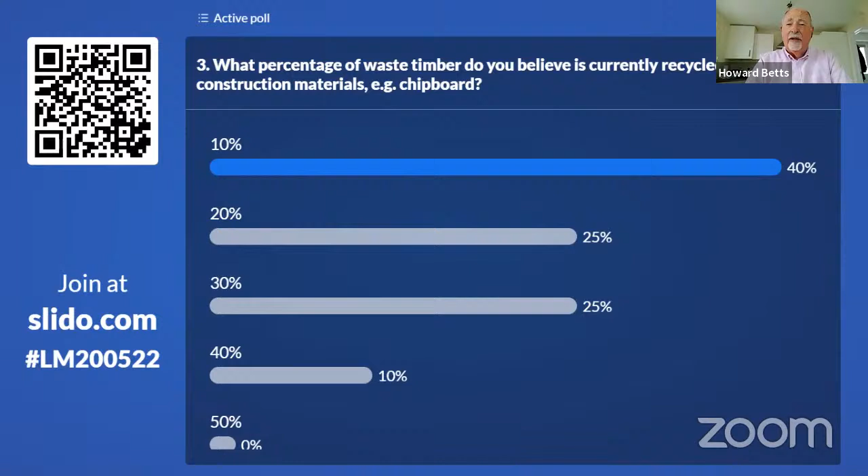Yeah. So, next question: what percentage of waste timber do you believe is currently recycled into other construction materials, e.g., chipboard? 10%, 40%. What do you think? Have people got that right, or are we going to wait for the answer? The answer is actually nearer 20, and we'll look at where the rest of it goes as part of the presentation. So, a big mix there. A lot of variation in what people think is actually happening at the moment, which is understandable. So, there's no right or wrong answer to any of these.

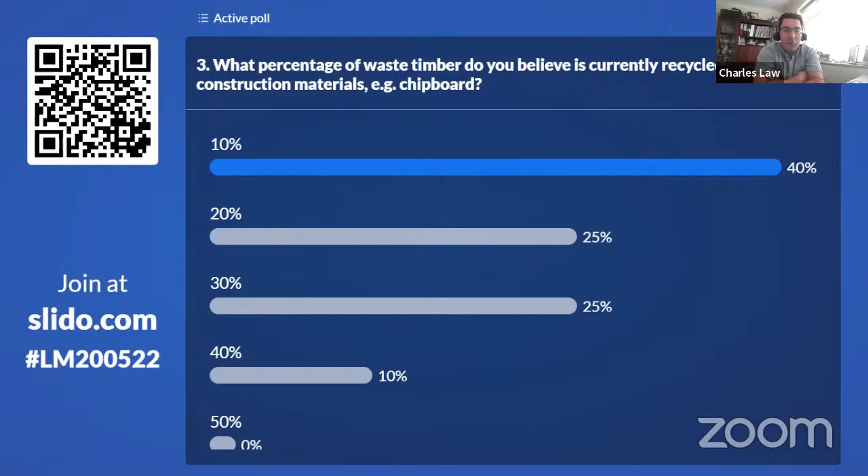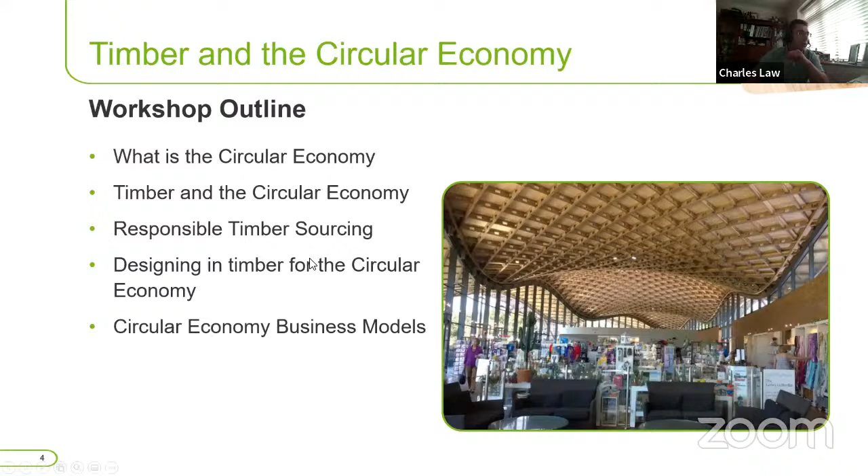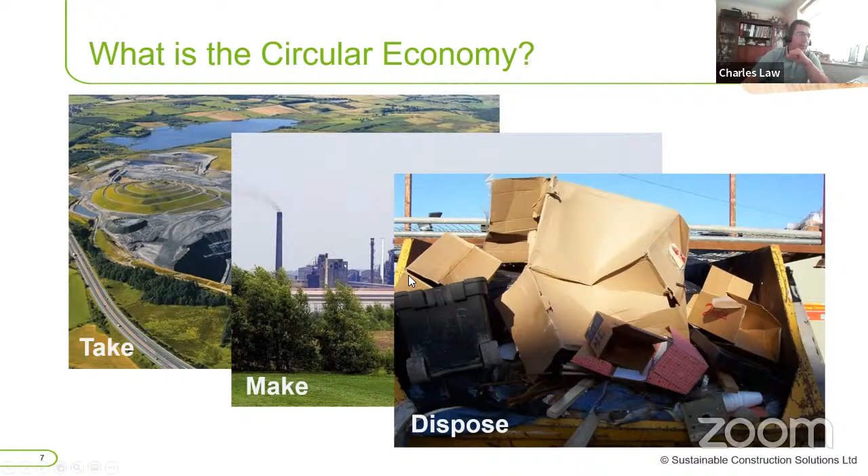And what is the circular economy? Back when I started in the industry, the circular economy was never thought about. We just had what we call a consumer model, where we take stuff out of the ground, we make stuff with it, and then dispose of it in skips. And that has resulted in a hell of a lot of waste. This is a diagrammatical explanation of that. This is the process of materials at the moment: take, make, dispose.

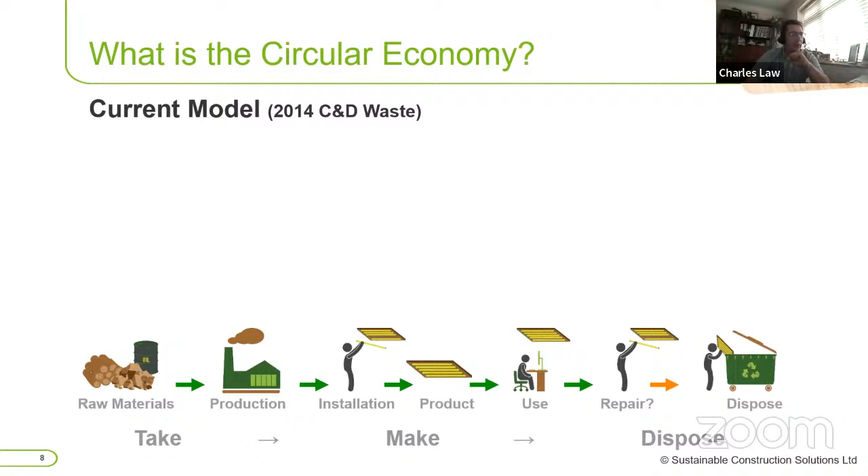Most of that goes off-site as waste in the various different parts of the supply chain. That currently ends up going through what we call a materials recovery facility, or a MRF. A fair proportion of that goes in the construction industry. Maybe a certain amount gets reused, but that's generally the heavy stuff. And when I say reused, that's probably downcycled into things like aggregates.

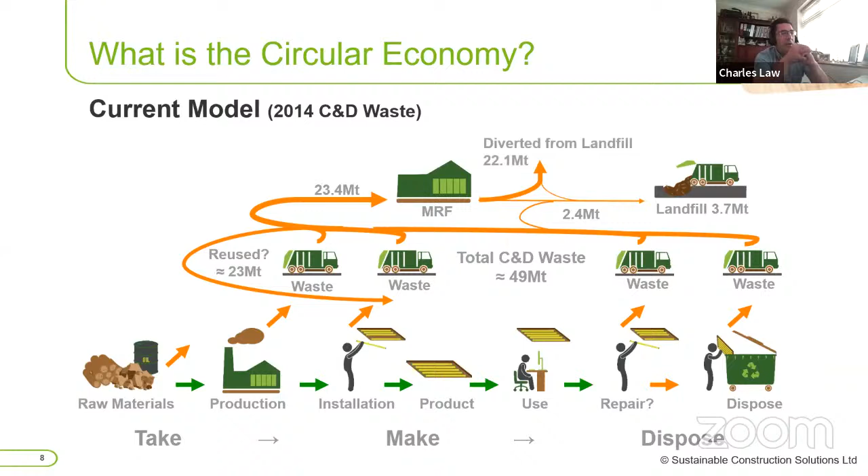And around 3.7 million tons ends up in landfill, and these are the last figures we got from DEFRA, because the last time they actually funded a study into C&D waste was 2014. So unfortunately these figures are quite old, but they may have improved slightly since then. But as I say, DEFRA haven't funded any further research in this. Now, we see a fair bit being diverted from landfill, but the trouble is up to half of that is actually going into energy recovery and waste.

A lot of the remainder is going to what we call open loop recycling, so there's no defined end use for that decided at the beginning. It's just, well, we've got some plastic or we've got some steel, we'll recycle that into something else, rather than being a closed loop model. Very little waste is going in through a closed loop model, and that's really where we need to get to, to really reach the circular economy.

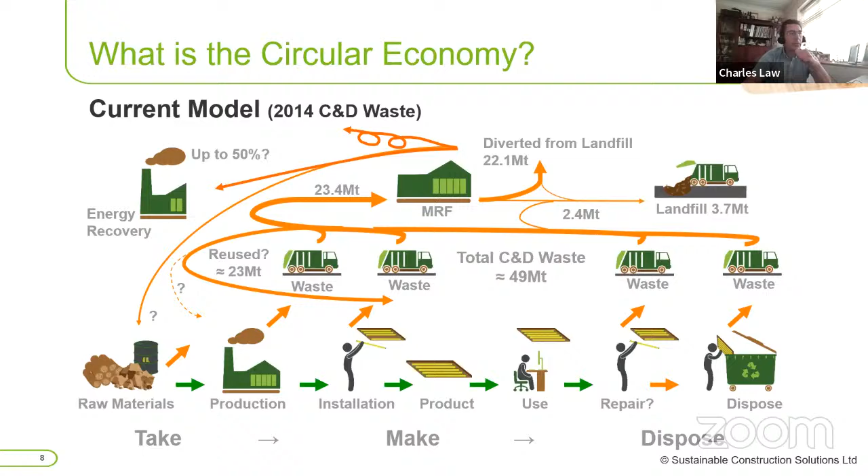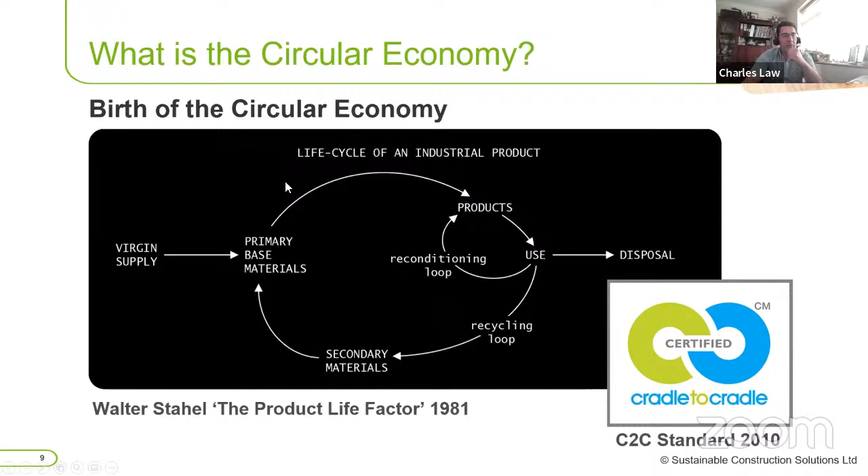That was improved upon by people like McDonough and Braungart, who developed their cradle-to-cradle standard in 2010. Also around the same time, you had the Ellen MacArthur Foundation come up with their butterfly diagram. Both of these sort of introduced this idea of these biological and technical nutrients, which on the face of it seemed like a good idea.

You've got your technical nutrients, which they talk about steel and stuff like that, which you maintain and reuse, redistribute, refurbish or remanufacture, and trying to keep it into the inner loops here is the best option.

Then you've got our biological materials, which, to be fair, timber would fit into, where we cascade recycle it and then it goes into the biosphere and goes back into the earth. But my view on this is actually timber sort of straddles both of these items, because especially when you start talking about engineered products like CLT and glulam, we very much need to make sure we keep them on the technical nutrient side before they end up in this cascading model.

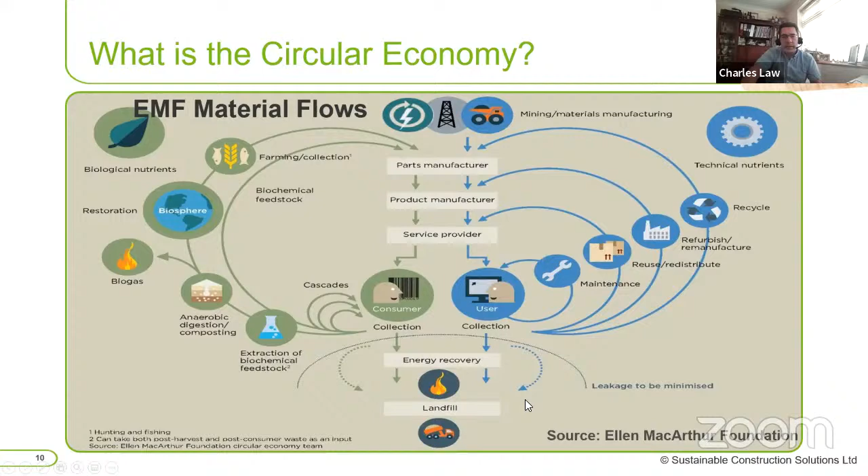Obviously, the key thing in this model that it talks about at the bottom here is that we need to minimize the material being lost from that cycle. So anything being burnt or landfilled, we need to keep to an absolute minimum.

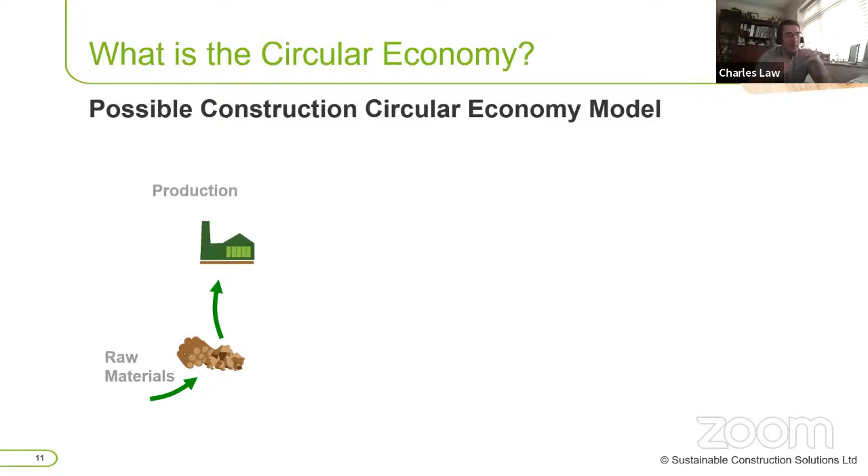So I've tried to then redefine this as how we could do this within the construction industry. We've got our raw materials coming in, and we've got timber and aggregates, and we've got our oil-based products such as plastic, which we're going to need to try and design out going forward, because it's just not going to be there. Our production facilities, we need to start moving over to more renewable energy systems to power those.

We need to look at the business model of how we're going to actually sell our products into the market. Where we sell things now, we're starting to see things around leases and service models starting to come into the industry, which might be the better option for our business. We see that with cars at the moment. 20 years ago, we've all bought our own cars. Nowadays, a lot of people are actually leasing cars rather than buying them. So that's an option we've got to look at.

We then install that product, and as part of that process of the manufacturing and installation, we're going to get some waste, which we need to try and make sure we recycle back into the system.

We then get our installed product going into our building, and we're going to use it. We need to make sure we maintain it to keep it in service for as long as possible, and try to keep that product in use. But obviously, it will come to the end of its service life at some point, and we need to try and make sure we deconstruct it.

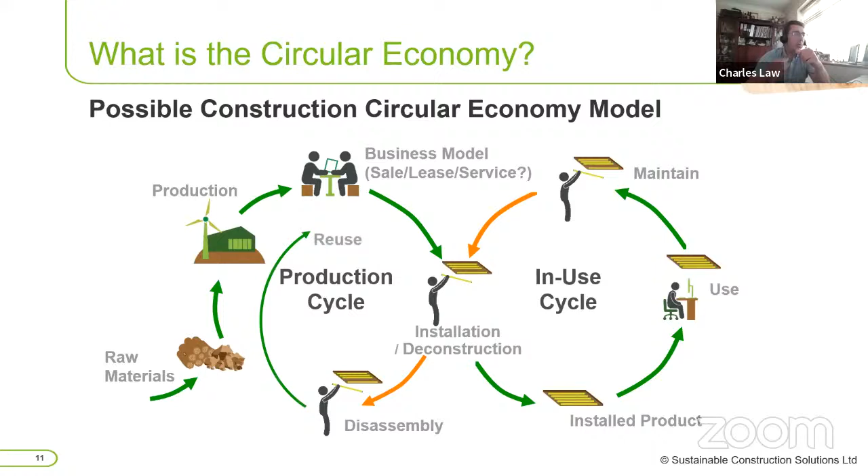It's deconstructible. We can then disassemble the product itself into these different component parts, and each of those component parts might then be able to be reused. Where they can't be reused, they might go back to the factory and be refurbished or remanufactured. And as a last resort, we should be really looking at recycling.

We talk about recycling being really good at the moment, but actually in the circular economy, that is the last resort. We need to think of all these other options first. If we do that, we can reduce that requirement on raw material, which is a finite resource. We talk about timber being renewable, but there is only so much out there we can use at any one time, so to a point it is finite. That will reduce our need on it, and anything lost out of that cycle, we need to make sure we've got some defined usage for it.

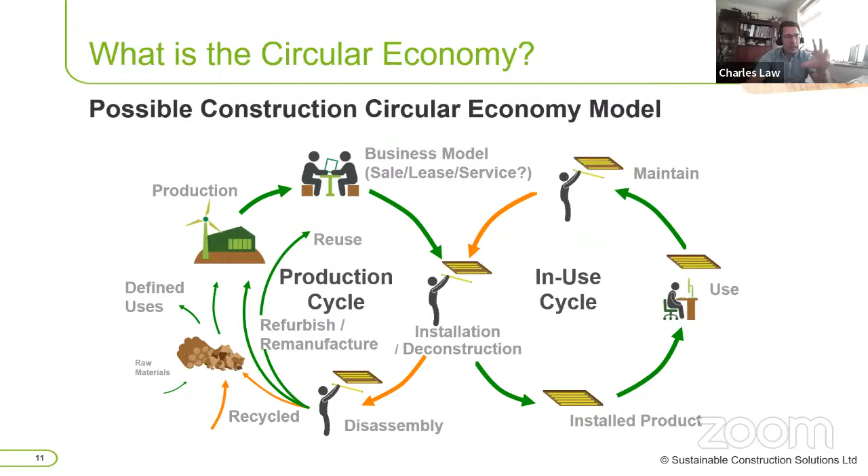So that's sort of the model we're going to be focused on today, and how do we move forward with that.

Focusing on timber specifically, this is a diagram produced by CEI Bois, the European Timber Industry Federation, showing how timber moved around the system. I've actually added to this, because there wasn't enough on it for me to say what's actually happening with all this material at the moment.

So we've got a very small amount going to landfill. Timber, actually, less than 1% of timber waste goes to landfill at the moment, which is great. Just to put some numbers on that, the vast majority, though, is very much going into energy recovery.

The biomass market, to me, is not the right thing we should be doing with certain bits of timber at the moment. We talked about 20% being recycled into panel boards or insulation, and another 10% going into animal bedding. But if you look at those, all apart from the panel boards are short-term products. So that carbon pulled out of the atmosphere by those trees very much disappears after a short amount of time, and it's only the panel boards keeping that carbon locked up. So we could be doing a lot more with that.

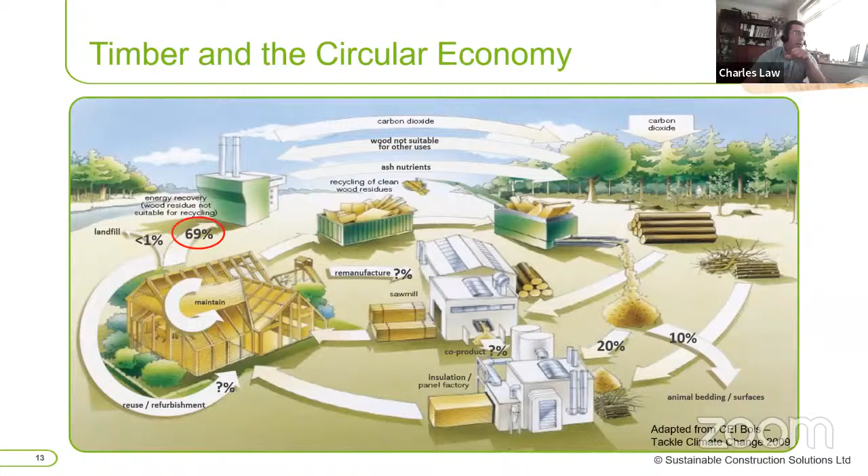We start looking at the maintenance, reuse and remanufacture elements, and we really don't know what's happening with that market at the moment — there is no data on that. But like I say, for me, we need to look at that recovery model.

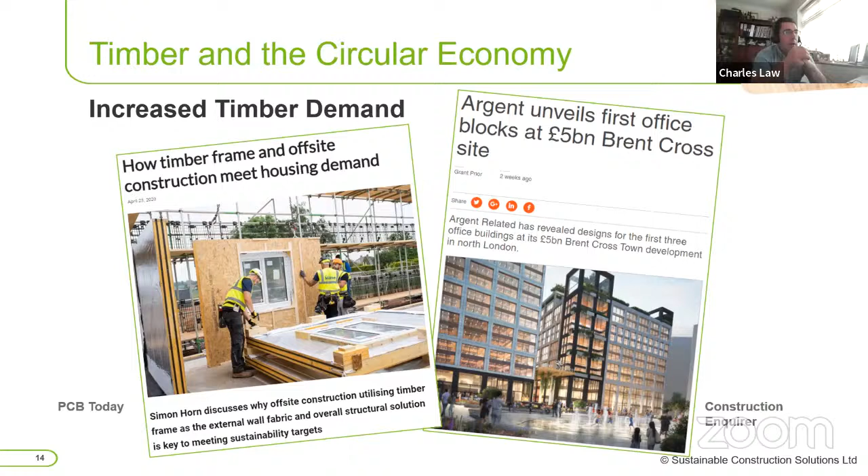We're getting ever increasing demand for timber. A lot of you have said you're going to probably be using more timber in your projects going forward. So where is that going to come from? We need to think of different ways of using timber and using different types of products that have the same end result, but by using different types of materials and being more resource efficient with that material going forward.

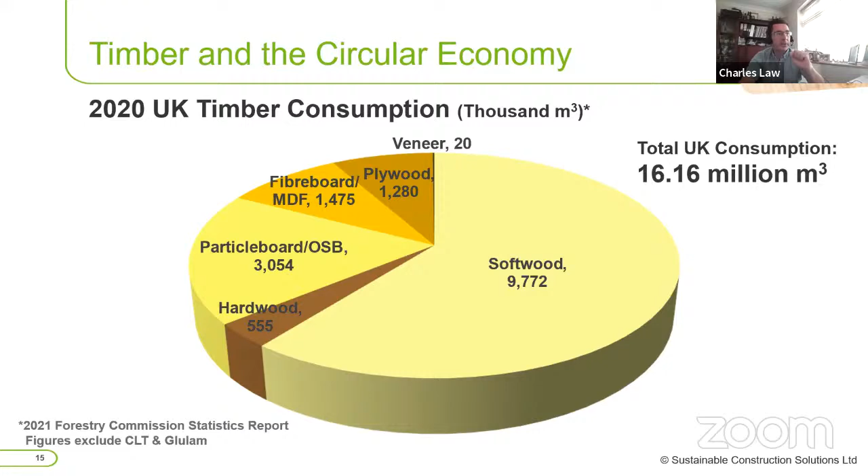On average, most years it's probably nearer to 17 million. This was obviously 2020, the pandemic year, so there was a slight drop there, but usually you're looking at around 17 million cubic meters of timber.

Now, when you start looking at where that comes from, most of it is actually coming from reasonably secure sources — the UK a decent percentage, and the vast majority coming from the EU. But then you start to see certain amounts coming from places like Russia, which is now gone. We've stopped all imports of timber from Russia, and there was 500,000 cubic meters of timber coming in just from Russia, and now that's got to be found from somewhere else. So there are issues around security of supply.

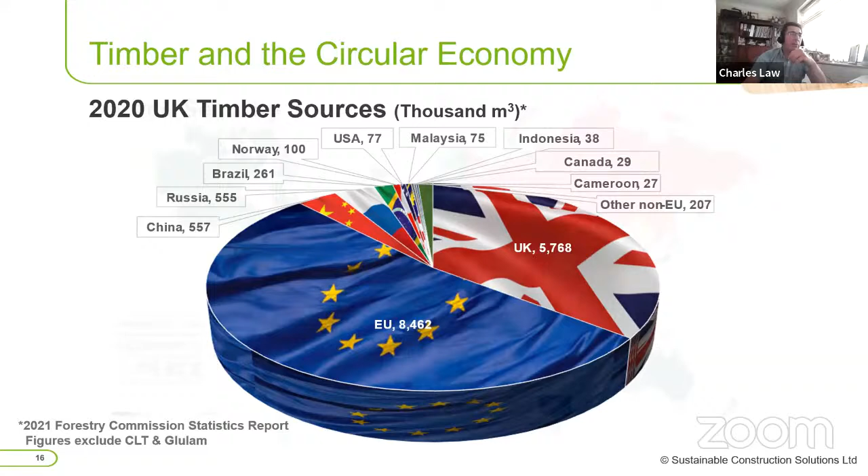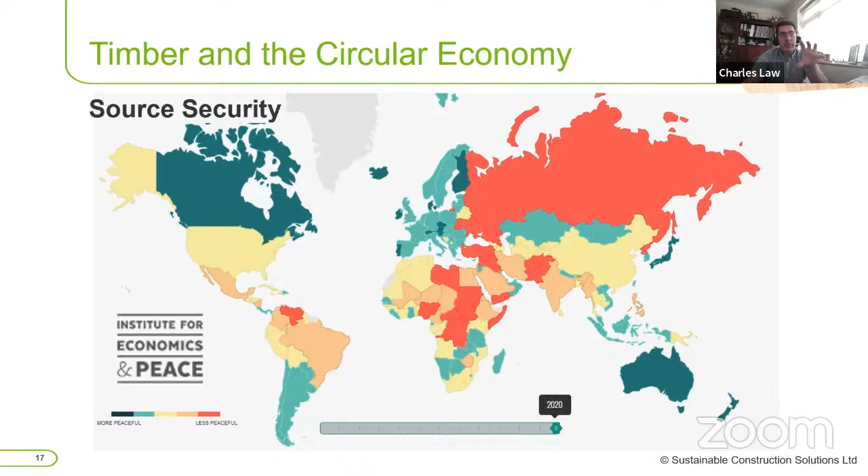When we look at the Institute for Economics and Peace's peace maps, we see Russia and Ukraine being very much an issue of source security, and that supply is now stopped — it's gone. Europe, luckily, is fairly stable, so we shouldn't see too many issues with those timber supplies, but everyone's obviously after the same timber at the moment. We talked about the amount of timber being lost — yes, it's that 4.7 million hectares.

That has gone down since the 90s, when it was probably at its peak when we first started looking at this. But when we start looking at where that's from, obviously we start looking at things like South America, Sub-Saharan Africa, and the Far East. Those are the sort of areas where we're losing most of that resource.

Luckily, most of the stuff we're getting from Europe is generally going to be responsibly sourced, and we're not, at the moment, impacting on that deforestation. But there's a lot of countries in Europe which are very much on the grey area, where it's just finely balanced. And if we start using a lot more timber, could that start to tip into a net loss? That's what we've got to be careful of going forward.

As far as drivers for the circular economy, you've got things like BREEAM. I'm actually on a working group with BREEAM at the moment to see how we can include more circular economy measures within it. There are some at the moment around waste and things, but that's only going to increase. And SKA is probably the one that's got the most circular economy requirements in it. So this is coming, and we are going to have to do it.

So how do we do this? Well, firstly, if we're going to be using timber, we need to make sure it's responsibly sourced. I think that's the first thing. Timber is a circular economy material already, if you're getting it from a sustainable source. We are replanting trees, and we're always going to have that resource if we use it efficiently.

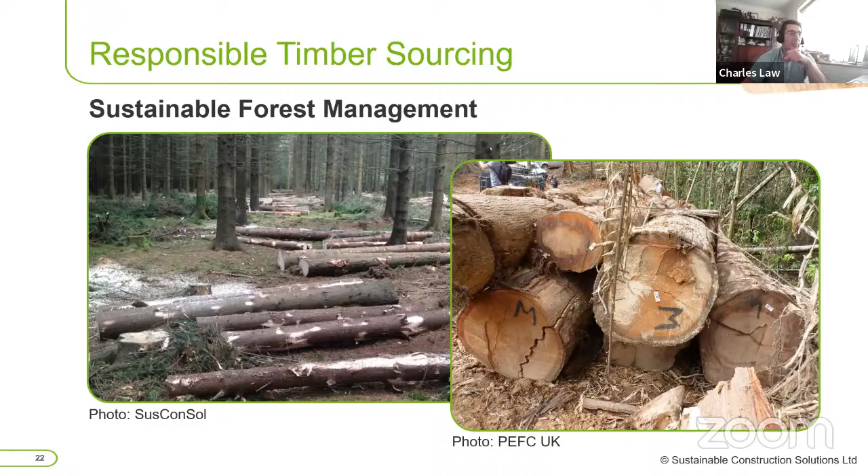Obviously, this is a requirement for many customers, not least the government, and a lot of companies have adopted similar policies where they'll only accept timber from legal and sustainable sources, needing appropriate documentation. That applies to all virgin timber and wood derived products used on the government estates, including temporary site work. So we need to make sure we think about things like hoardings and shuttering timber and any protection that you might use. A lot of timber is used in those elements on certain sites. So we need to make sure we include that in there.

Basically what the government has said is that you need to make sure you comply with one of these, with their central point of expertise on timber. So you have to gather evidence either from independent forest certification schemes, such as PEFC, the Programme for the Endorsement of Forest Certification, who are actually sponsoring today's event, FSC, the Forest Stewardship Council, or Grown in Britain, although that's in the category B evidence at the moment. That's likely to move into the Forest Certification Scheme when they update this. So, as a UK forestry source.

That's our best way and easiest way of ensuring that our timber has come from that responsible sourcing. And like I say, if you want to learn a bit more about responsible sourcing and how you can track that, if you weren't on our last course, look at the PEFC website and you can sign up to one of their responsible timber sourcing CPDs that we do on there.

Where does that responsible source timber come from? There's a lot of countries in the world now that are sourcing timber that's got forest certified to one of two standards, PEFC or FSC. You can see that most of the forests in Europe and North America are actually certified against one of the PEFC type schemes. FSC is generally concentrated on the high risk areas, such as South America, Africa, Far East, and Russia.

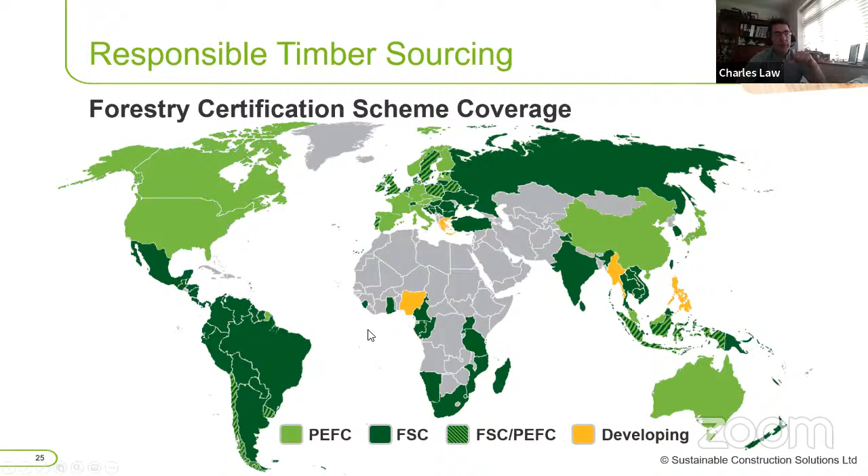What we're saying is one scheme isn't better than the other. Just make sure that you don't just choose one scheme, because there are some companies out there that say it must be FSC timber. But if you look at this, that could cause an issue with your supply, because you're very much limiting where you can get your FSC timber from if you just specify FSC. Especially in the situation at the moment where there is a shortage of timber, you might not get what you want.

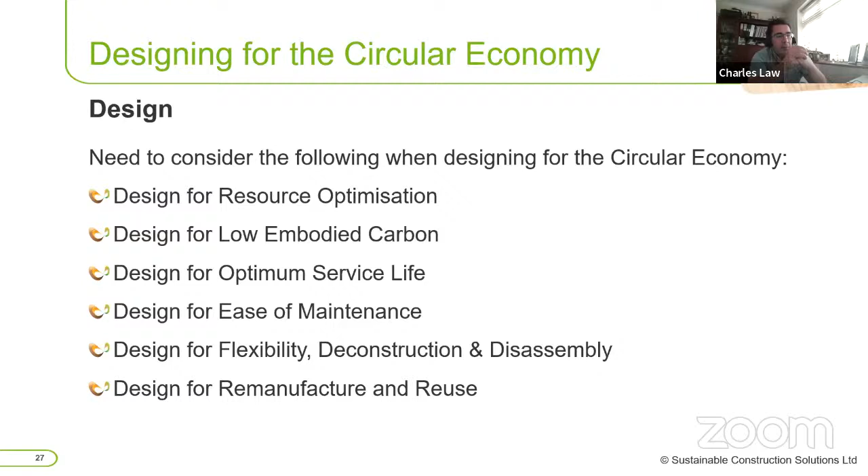So moving into designing for circular economy. For me, what I've generally broken this down to is 6 main areas. We need to design for resource optimization, design for low embodied carbon, design for optimum service life, ease of maintenance, flexibility, deconstruction, disassembly, and then remanufacture and reuse. We'll cover each one of these in turn as we go through and explain them.

Designing for resource optimization can mean a number of things. The first one is you make the best use of the existing resource available on the site. So if we've got an existing building or structure there, should we actually reuse that rather than knocking it down and building new? Let's do a pre-demolition audit of the site, look at what's there, and see if we can actually reuse most of that, if not all of that structure, in our new build.

The next bit is we need to make sure we use the best use of the resources from the forest as well. So rather than just using lengths of timber, which we may have done 60, 70 years ago, we would have chopped a tree down and maybe only got 50, 60% of the wood out of that timber, because we want to change a round item into a square or rectangular section. So there's a certain amount that's lost out of that. And when the tree's growing, we thin certain trees out that are in the way of the good ones that are growing. What happened to those?

What happens now is things like OSB, orientating strand board—you might know it as sterling board or smart ply—that's made of those thinned materials. So we're making a much better use of the resource. The stuff that we're cutting off, we might be using some of that for pallet wood or the falling boards on the side. The chip and sawdust material is going into things like chipboard, as a co-product from the primary processing. So we're making much better use of that round log, where in the past we might have only used certain parts of it.

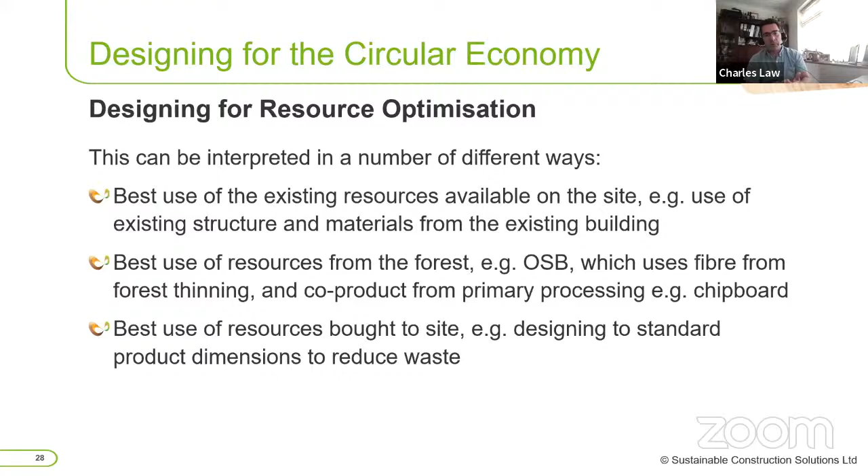So we've made the best use of the resource from the forest, but are we actually making the best use of the resource brought to site? In that situation, it's about minimizing offcuts, minimizing waste on site, designing to standard product dimensions to reduce waste, and off-site construction so we can utilize a lot more of the material. Those are the sorts of ideas that we might need to think about there.

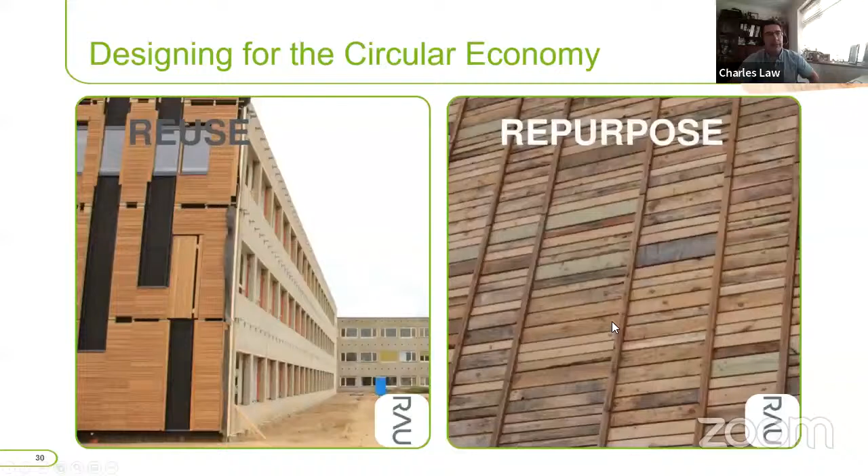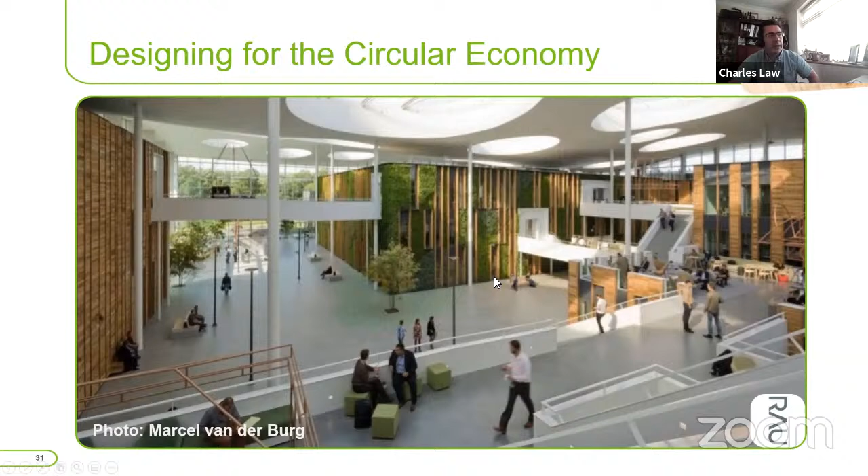This is actually pallet wood from waste pallets that they've used internally as a cladding material, and what they've ended up with is this building inside. So this is the pallet wood on the left-hand side here, and on the right internally, obviously because it's not treated. That's what the internal artist's impression was, and that's the actual picture of the completed building.

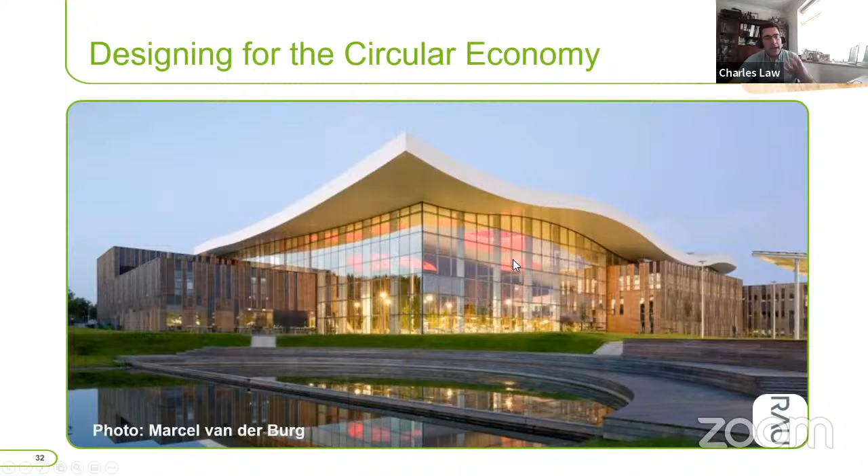So all of these bits that are poking out the sides, they are those original horrible looking concrete buildings that we saw in the original picture, turned into a lovely open plan office environment. So you can make much better use of existing buildings if we think laterally.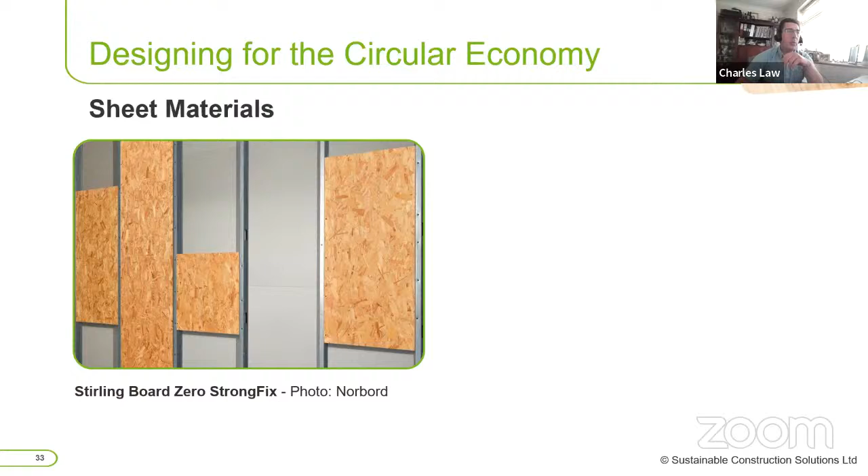Talking about how we can use better resource from the forest, we talked about OSB. There's lots of different types of products this can be used for now. You can use it as flooring or as a sheet roofing material, as many people may know. But also they've got lots of different sub-products associated with that. Things like Stirling Board have got their StrongFix, which can be used for pattresses within stud walling systems, for example. Or SmartPly have got their ProPassiv, which is an air-sealed board, which you just have to tape the joints on to create a passive house structure.

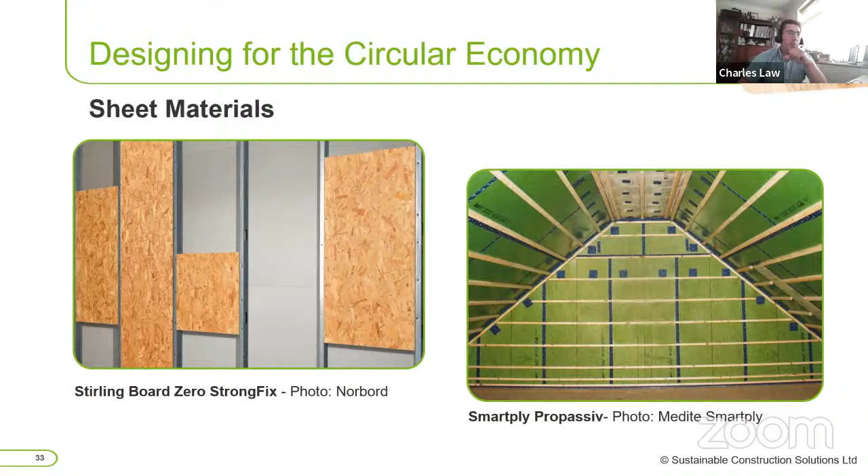So there are many more different products now being made out of things like Smart Ply, making much better use of that material from the forest.

You've also got engineered products like these I-joists from Metsä, where they've got an OSB web in the middle there, with a plywood or LVL top and bottom to them.

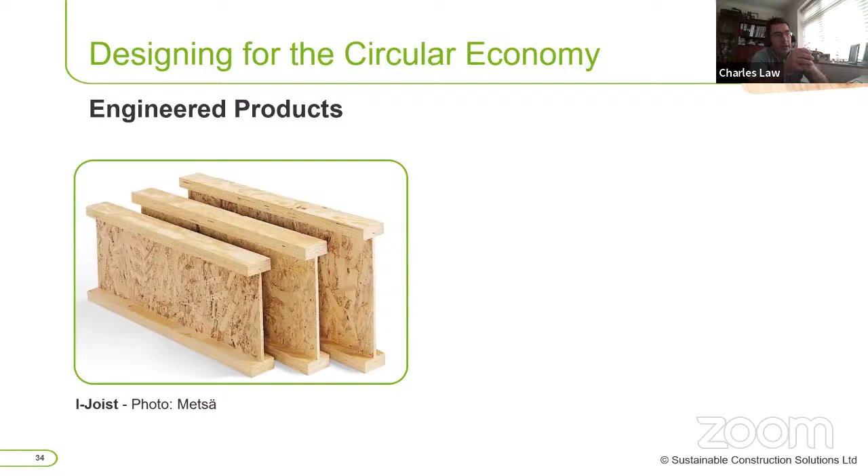So again, we use this rather than using solid bits of timber that we may have used in the past to make a large joist. We're now using much smaller bits of timber, much less timber in that product, made from a much more renewable resource, because we're using all the offcuts that would have been skipped 20, 30, 40 years ago. We're now making a much better product that's actually much stronger than the original piece of timber we might have used. LVL is another similar example, where you've got these long beams that look like plywood.

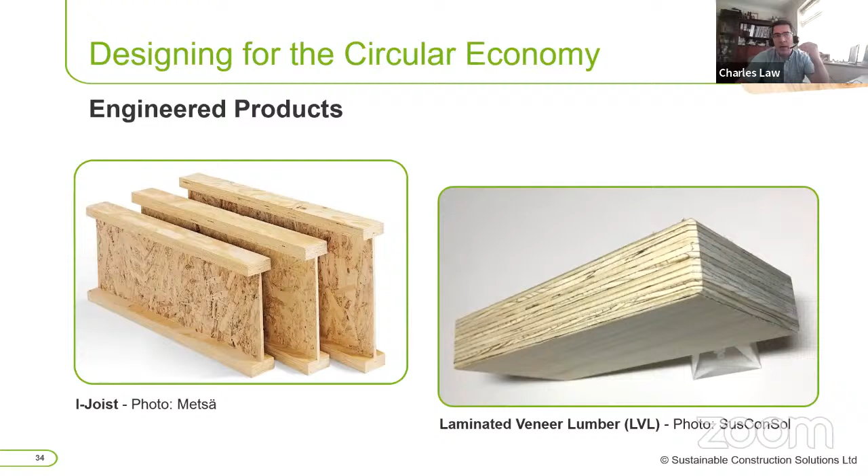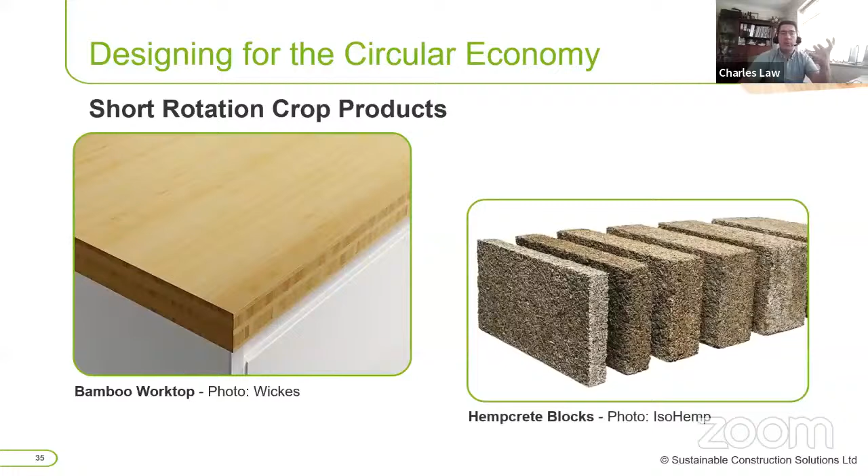And then we need to look at other products as well, where we might use timber at the moment - could we use other crop materials, so short rotation crop products like bamboo and hemp, so hemp blocks that might be able to use, which are all grown materials, not timber, but a grown natural fiber product that we could start using.

We need to be designing for lower embodied carbon, and like I say, timber, when it's growing, it's taking CO2 out of the atmosphere and turning that into carbon in the actual timber in the tree.

So on average, you might get sort of 1.6 tons of CO2 being stored in every ton of timber. It works out about 700 kilos per cubic meter of timber, if you want to put it that way.

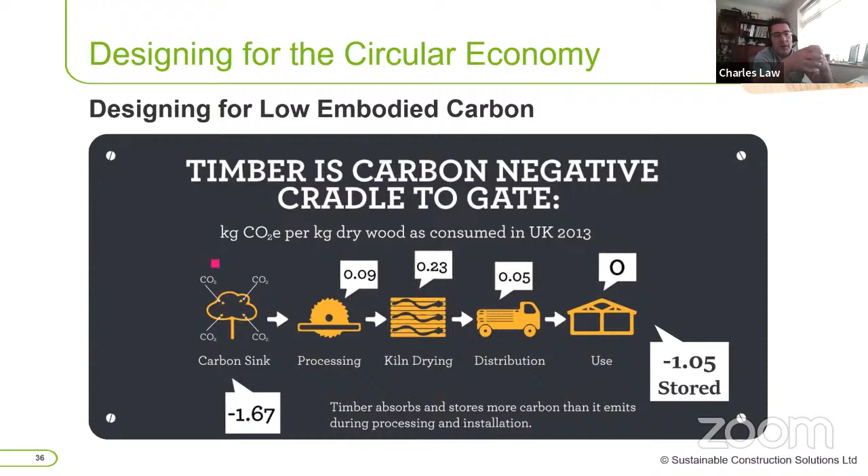And obviously the processing of that product is also fairly low carbon. So what you end up with in that building is a certain amount of stored carbon, locking that carbon away for the length of the building. So what we want to make sure is that we keep that timber in use for much longer.

And like, I'm talking about timber today, I would look at using more timber instead of steel or concrete going forward.

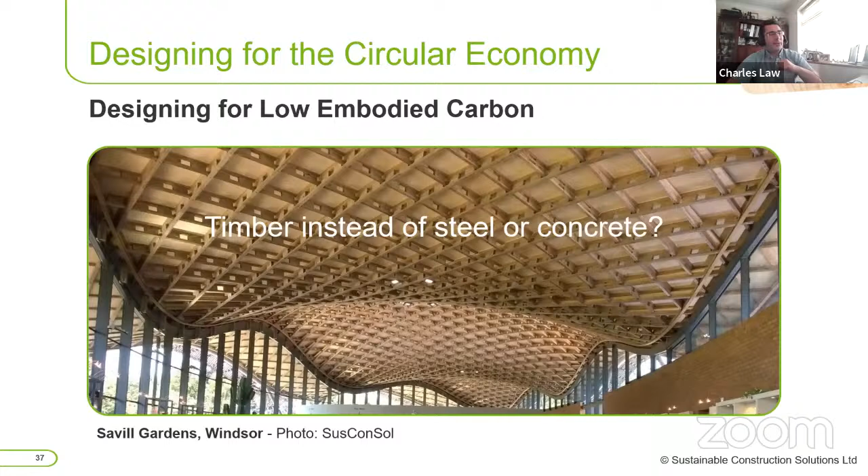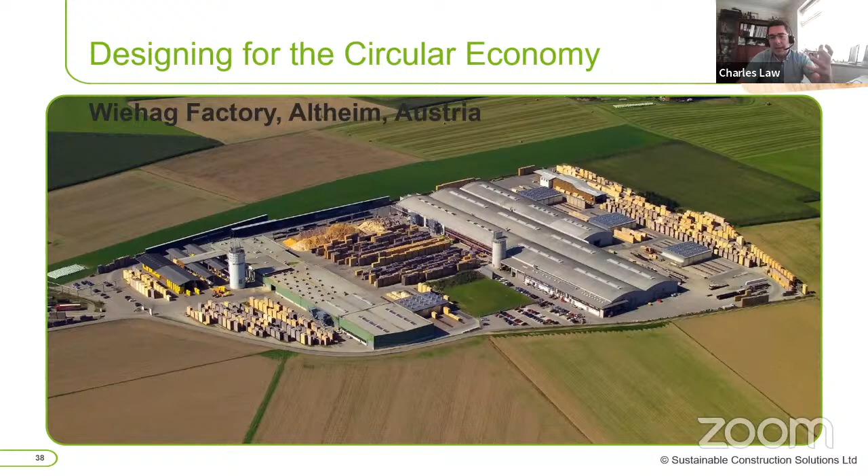We've also, when you start looking at how that's processed, got some good examples of timber factories reducing their carbon footprints to very much close to zero. Wiehag, for example, has got their factory generating something like 38 gigawatts of renewable energy from the waste from their processing. That's around 10,000 tons of sawdust and offcuts being used for that. That's covering all their kiln drying, their electricity for processing. And I think they're actually a net exporter to the grid as well.

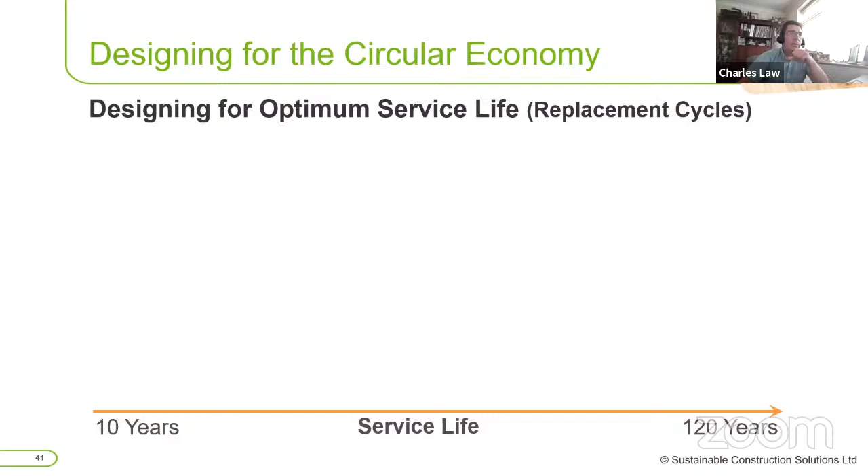We then need to start looking at how we design for optimized service life. I'll talk about optimized service life here because not every product will be able to be designed for extra long life. Let's take, for example, a flooring material.

Previously, we might have used carpets, but flooring material is not going to be there for 100 years. It may be, but fashions change. People might want to change the flooring in their house. And if you use a timber flooring, could you design that in like this version here so that it could be reused, etc. But using wooden flooring rather than carpet is obviously going to last longer as well in that situation.

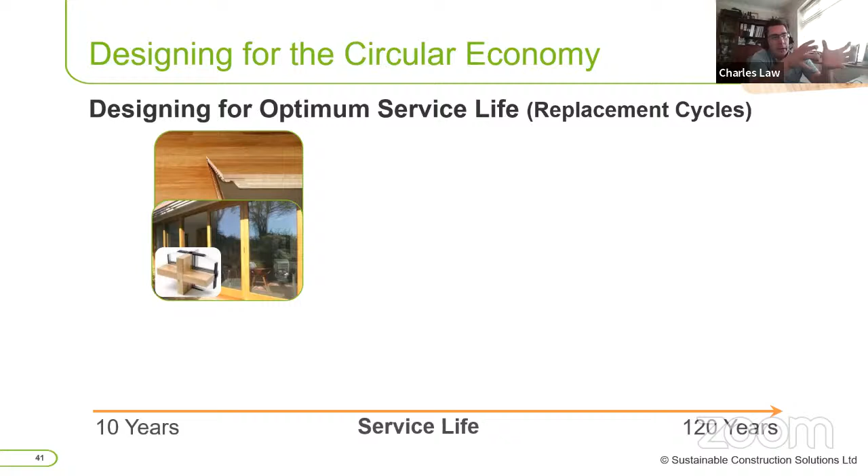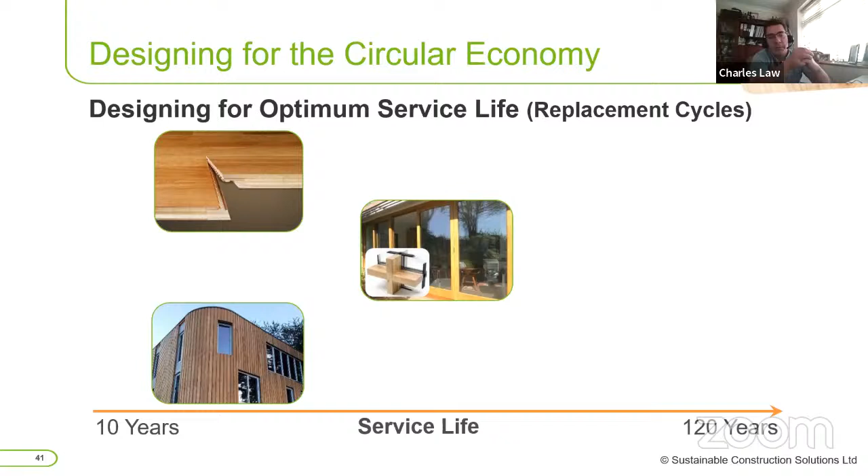Could we look at our timber windows at the moment? Could we look at extending the life of those in some way through some sort of treatment to make them last longer? In a similar way, our cladding might only last 15, 20 years at the moment. If you just use a softwood cladding, could we use a different species of timber that's going to last longer? Or again, some sort of modified product that means that product can last a lot longer, maybe 60 years, even longer than that.

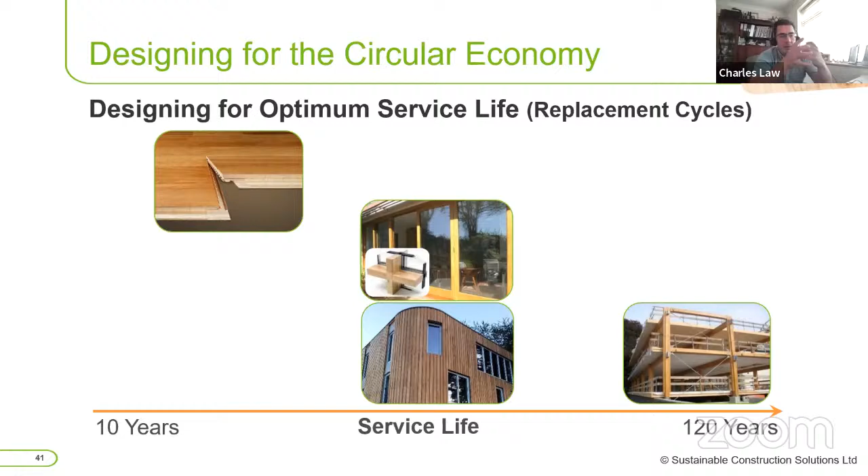And obviously our frame, we need to make sure we design and detail that to ensure that it doesn't get damaged during its life and can last that minimum, say 100, 120 years plus. And that can be done. If you look out there, there are timber buildings in use at the moment that are over 500 years old. So this can be done. It's just a matter of making sure that we build these things in the right way.

So looking at some of the things we might want to do, we can look at different types of timber. So whether that's a durable softwood, such as a Western red cedar or larch, which are in these pictures here, or on the right-hand side, some sort of durable hardwood. A lot of people go for oak, but actually this one here is a chestnut.

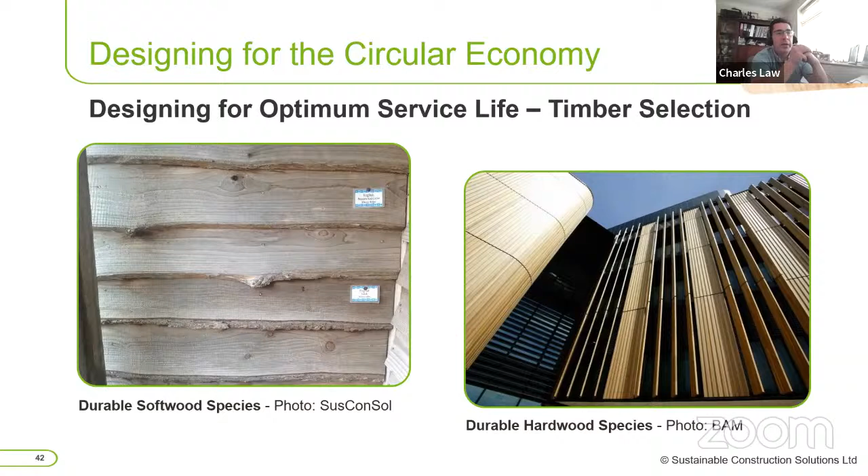A sweet chestnut looks very similar to oak in the color and the grain, but can be produced from a coppiced material. So that tree is continually grown, and we just take parts of it off each time. So a coppiced production. So could we look at using different types of timber?

We've obviously got chemical treatments, and we talk about our copper chromate arsenic, CCA, treatments. They're very good. We've used them for probably the last 60, 70 years in timber. The trouble is chemical treatments could limit the future reuse of that timber going forward.

We've just finished a project with the Wood Recyclers Association and the National Federation of Demolition Contractors, which showed that some of the timber that's coming out, particularly the smaller section timbers like tiling battens and maybe some stud material, may now be hazardous, and we won't be able to reuse that timber in certain buildings going forward. So we do need to be careful how we treat timber to make sure that it can be reused.

But if we are going to use it, make sure that we're using it in the right place. So don't use a use class 2 outside, because it's just not been treated to the right level. There are different use classes, so make sure you specify the right use class for the right location. So for internal structural timbers, your floor joists, roof joists, class 2 is okay.

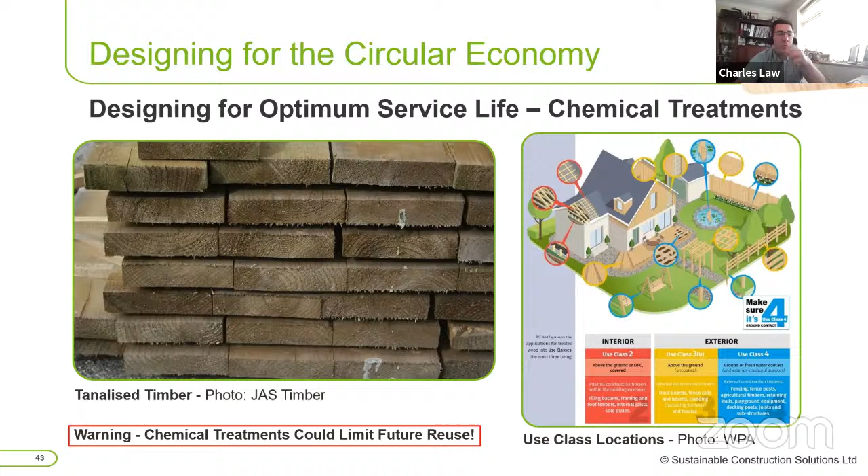But if you're looking at something like a decking or a cladding, cladding that might not be in contact with the ground, use class 3, but something that's in contact with the ground, like a decking structure or your fence posts, that would need to be a use class 4. So make sure you specify the right use class for the timber you're using.

But we have seen some more modified timbers coming through over time, and people might have heard of Accoya, but there's also things like Kebony, which are treated with alcohol in the case of Kebony, and in effect vinegar, so acetylated timber, which modifies the structure of the timber and makes it unpalatable to the pests, the insects and the fungi that would usually feed on timber and cause the rot that we've all seen in timber products.

So basically this is totally changing and modifying that timber into a different product. And let's say Accoya, for example, will guarantee their product for 50 or 60 years. So we're starting to see that extension in the life of the product. There's also things like thermal modification.

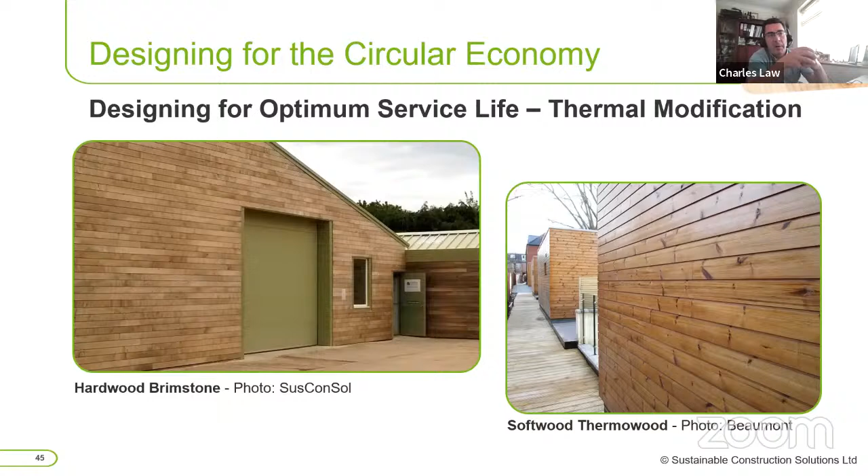Similarly with softwood, this is a Thermowood. Again, this type of softwood, a pine or a spruce, wouldn't be able to be used outside without some form of chemical treatment. But by thermally modifying it, again, it means we can use it outside. So that's sort of extending the life, but we also need to look at utilization and optimizing that service life by increasing the number of uses of that product.

So we talked about hoardings, and we've also got things like packaging material, pallets there, which are generally single use. We put a hoarding up and make it out of ply and lots of bits of timber, and then at the end of the job it goes in the skip, and that's not a good use of that product.

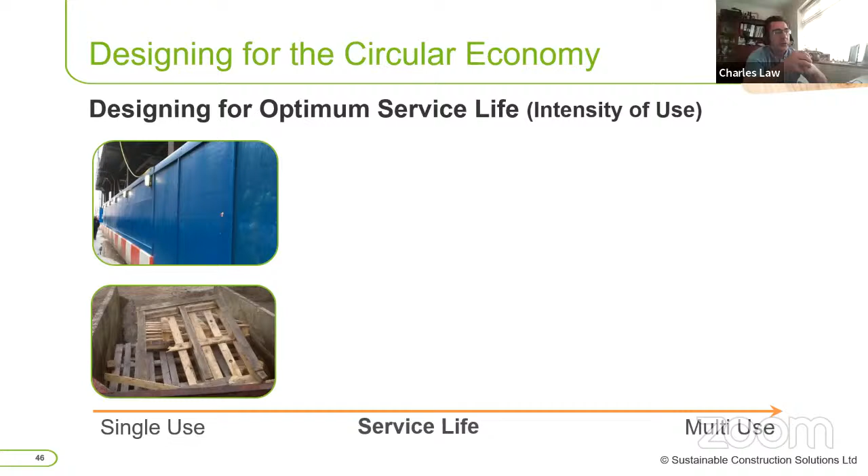So looking at different options, you've got things like Hoard It, which is a reusable system which uses metal supports to hold the plywood, and the plywood doesn't have any fixings going through it, so it means there's no moisture ingress into that plywood, and it can just be stacked up and reused for the next project along with a support system.

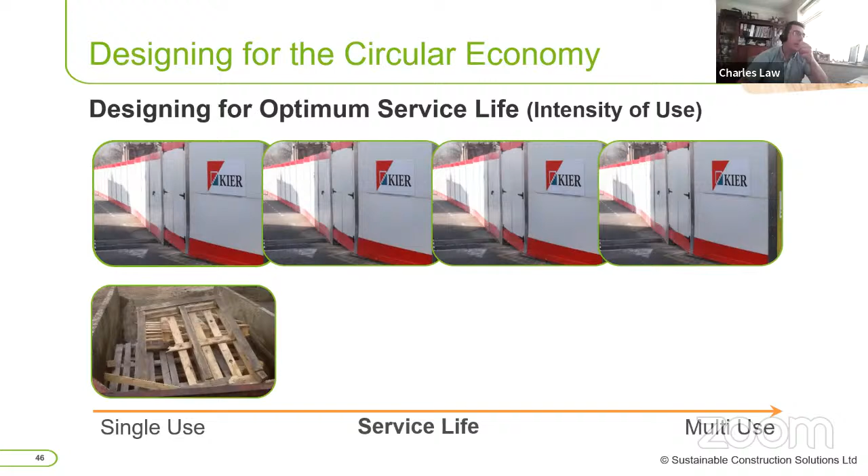And pallets, there's a new system coming in at the moment called Loop, which is a pallet pooling system, which means materials will come out on Loop pallets, come to the construction site, the materials will be used, and the pallets will be sent back, refurbished, and reused for new products.

That alone, the estimates from Loop say that we can cut our timber usage for pallets from around 600,000 cubic meters down to maybe 150,000 cubic meters, with accompanying reductions in carbon footprint and everything else. So some big savings to be made, and then that timber that wouldn't be used for pallets now can maybe go into other construction materials.

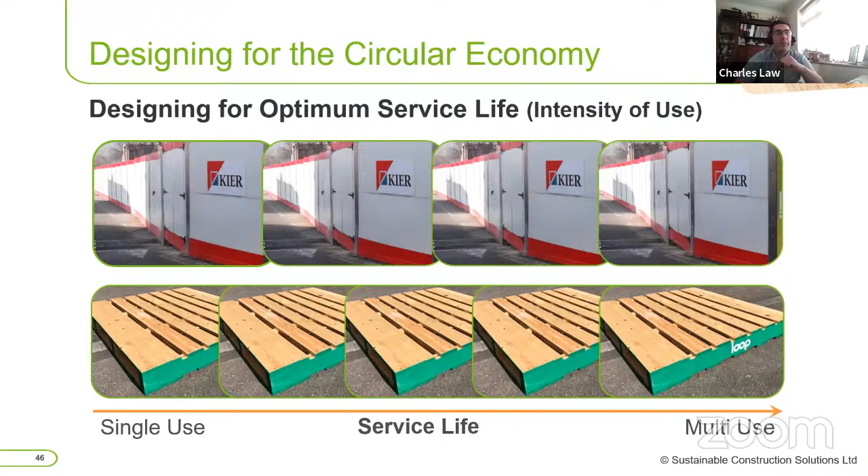We need to design for ease of maintenance as well. So that's the next step. So going back to our cladding here. Sometimes we put cladding up and we want to paint it. But if we can't get to that cladding again, then how do we maintain that cladding going forward if it's fairly high up on a building?

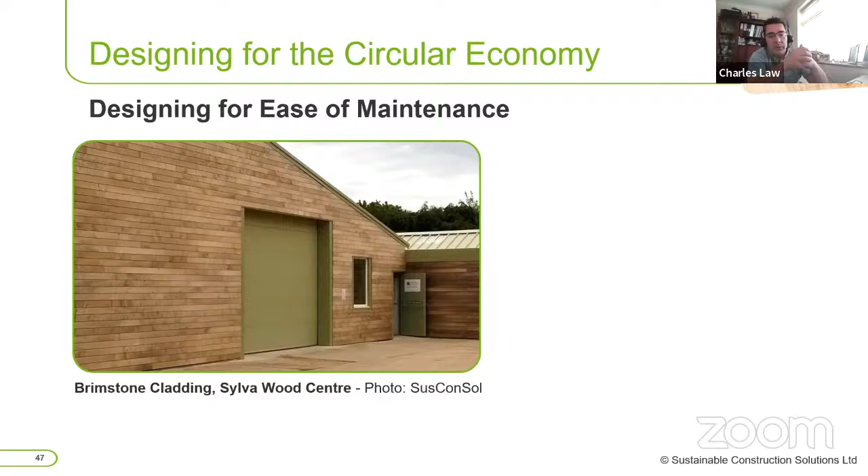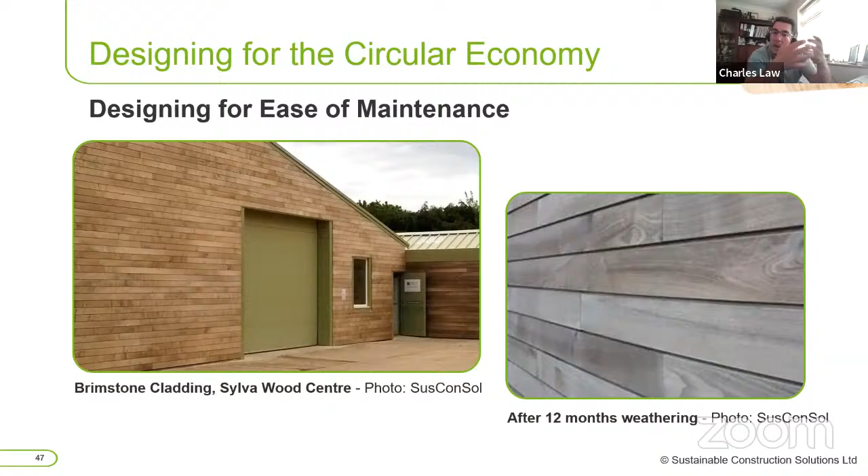So sometimes the best thing to do is actually not to treat it at all. Brimstone is designed to not be treated at all, and what it does, it fades to a weathered grey within around 12 months, and you can see it on the right there. So it still gives you a life material, and we don't have to touch that again, so you haven't got that maintenance issue going forward.

We then need to design for flexibility, deconstruction, and disassembly. So this is key for a circular economy. At the moment, we design stuff and we bolt it together for a single use, and then when we want to take it down, in the olden days it would have been a ball and chain, but we generally now go out with a hydraulic grab on a machine and just pull that building to bits. Now, that's not going to help with the circular economy.

We need to build buildings so they can be deconstructed at the end of their life and moved and maybe reassembled somewhere else. So we need to look at different types of joints. So you've got on the left there things like what we call a Sherpa glulam connection. Rothoblaas do a similar one where it slots into a holder on the main beam there and holds all that frame together. At the end of life, it can literally just be lifted off.

And similarly, you've got this example, which is a floor, and they've got what they call the Woodloc 5S connection. In effect, that engineered wooden floor folds together and creates a homogeneous flooring system, but if someone wants to take that up, they can actually just fold that timber back out and move that flooring somewhere else. So, great systems.

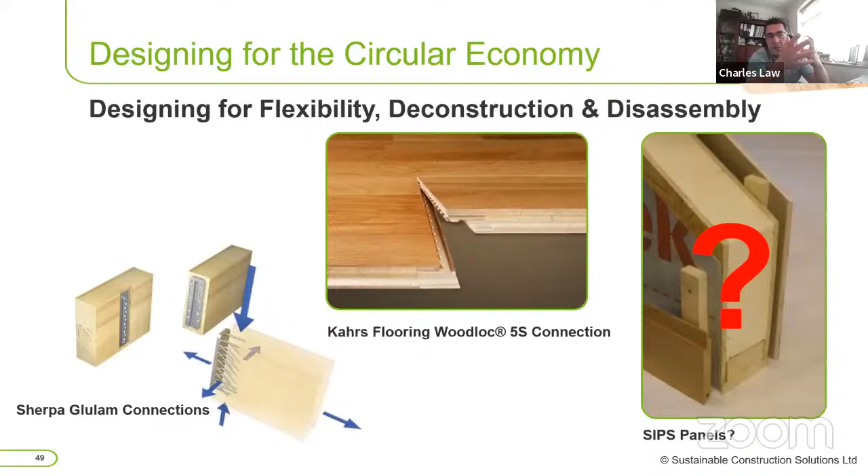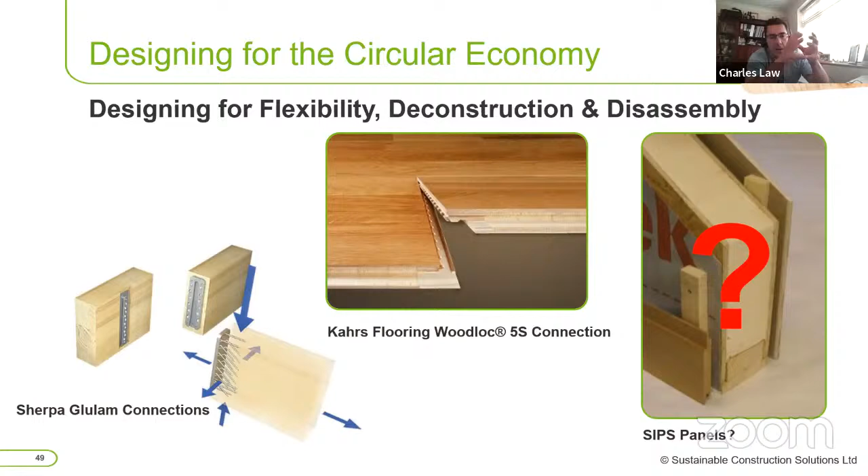We are starting to see some modern methods of construction that I'm not too sure about how we're going to recover them at end of life. One of those is things like SIPs panels, for example, where the jury for me is still open on this, where in effect that's two sheets of OSB bonded onto an insulated panel. It's a great product, really insulating, but how do we recover that at end of life? And we need to start thinking about that.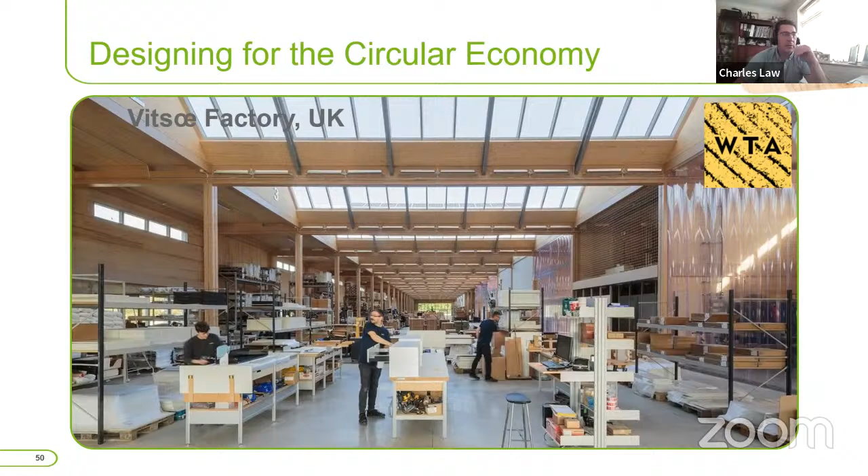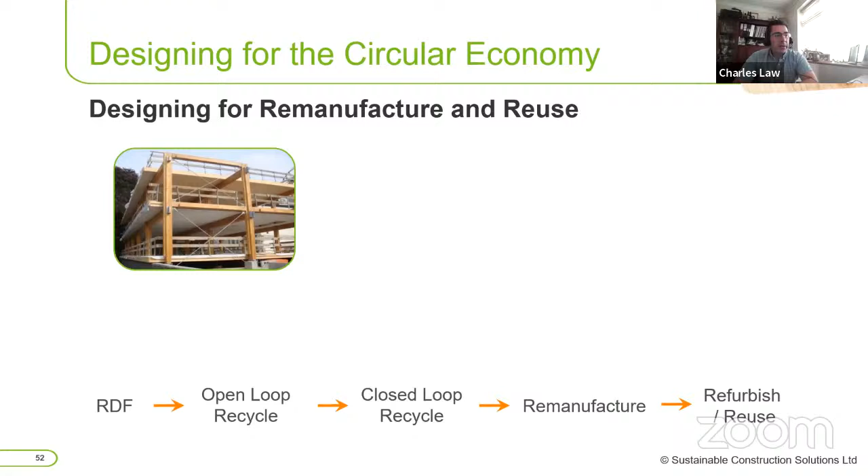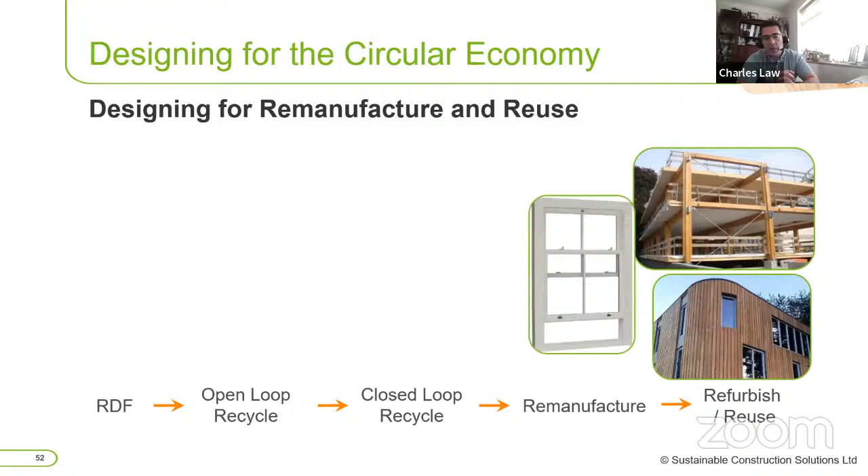We need to be designing for remanufacture and reuse going forward. So whereas at the moment we might design a building and it might be going to refuse-derived fuel or biomass, or possibly into some sort of open loop recycling, we need to be designing that building so it can be dismantled and reused, or the component parts taken apart so it can be remanufactured, refurbished and reused going forward. So moving them up this reuse hierarchy.

Some examples, again, these are from the Netherlands. Heijmans have created this house that cranes into position, can be assembled on a site that's only maybe available for a short amount of time, maybe one or two years. They can put this housing in place, house families or individuals, these are quite small, maybe more so for individuals, for a short amount of time, but then move them somewhere else when another piece of land becomes available. So, very much a reused item there.

And then this example from Australia, where they needed to build a new building because they had an urgent demand for a building, but the land they wanted to build it on wasn't available at the time. So they had a spare plot of land on the college, and said, right, okay, we'll build it there, and when this other plot of land becomes available, we'll actually move it. So this building has been designed to be dismantled and moved to another plot at some point in the future.

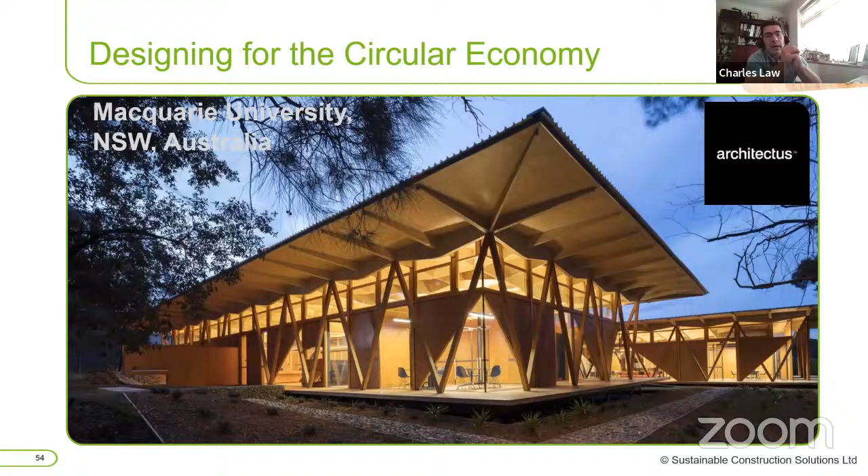So we've got some ideas on how we might be able to keep those buildings in use with circular economy designs, but how about the business models? How do we sell these products into the market going forward? So the thing we need to look at is our source for our raw materials. I call this the 5 R's. They're either reused resources, refurbished, remanufactured, recycled, or renewable.

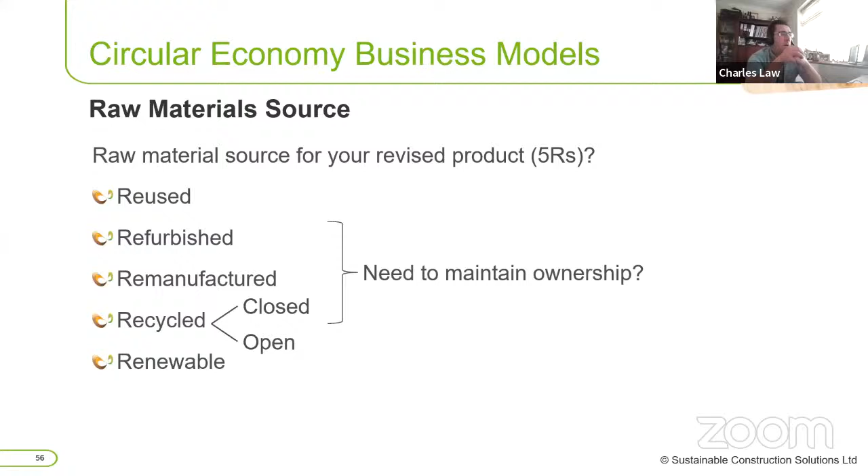So that's our resource. For recycling, we might have two options there: closed and open loop. Closed loop means that it's been designed to come back and be recycled within the same system. Open, as it says, is just designed in the hope that someone else might pick that material up and use it in the future. So obviously the closed loop is the much better option. And if we go beyond that to refurbish, we might need to think about maintaining ownership of that product as the manufacturer, so we can get that material back, refurbish it, remanufacture it, and then push it back out into the market. So how might we want to do that?

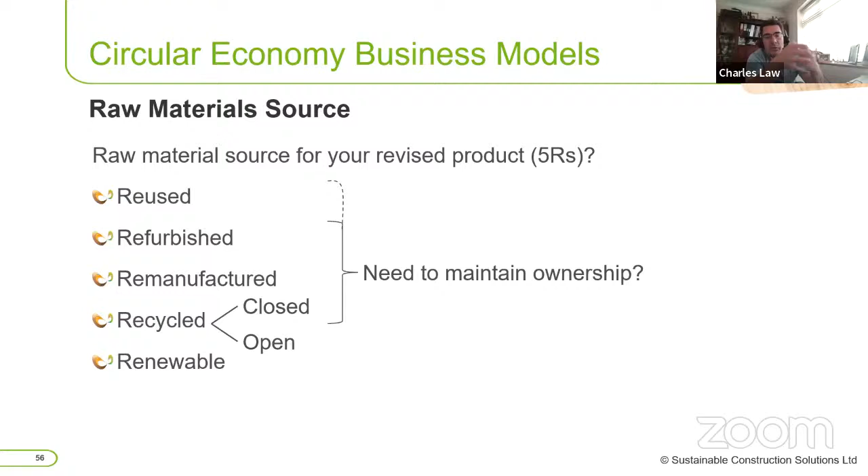So there's lots of options here on how we might want to keep those products in use. We've got things like asset management, tracking the assets. That might be if you own a load of products and you might want to move stuff around your own estate. That might be good for, say, a university. I know one that uses this, and they track all their desks and chairs so when they redevelop an area, they know whether they've got furniture somewhere else that they could reuse for that newly developed area.

Collaborative consumption is a similar thing, where you might have people in a block of flats or a small community where they share certain tools, maybe lawnmowers or hedge trimmers, because everyone needs them, but they only use them every now and then. So could there be some sort of collaborative consumption there?

But things like service products, for lighting and boilers, could that be done under a service contract? So we don't buy the product, we just have a service contract with someone, and they come in and supply the piece of kit and then maintain it going forward.

And where it doesn't need to be serviced, do we hire or lease it over a defined period, then return it to the manufacturer at the end of use? Things like that are starting to come into thinking now. Or incentivized return, where we reward someone for returning it at end of life - in effect, a deposit model. Like the pallet model we talked about earlier, there's an incentive to give that pallet back because you'll get some money back at the end.

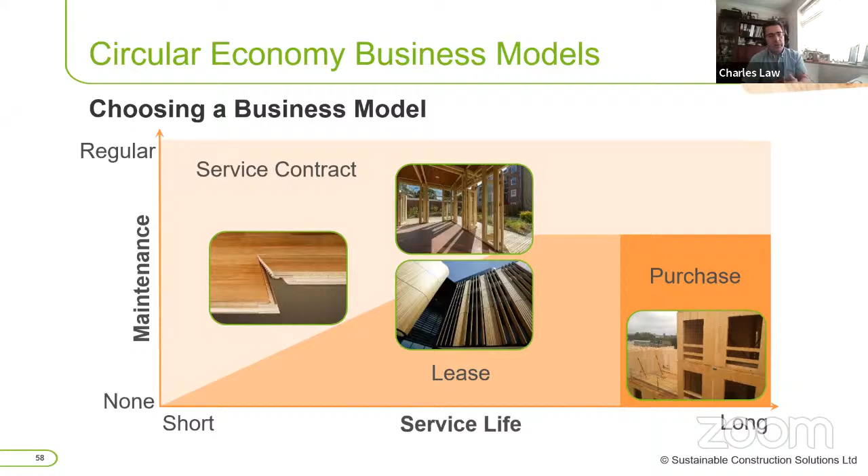So we can then start to overlay what model might best suit that product. Flooring, windows and doors may suit a service type contract. Your cladding might suit a long-term lease, because you might be able to replace it after 30 or 60 years. But your frame you might still purchase, though there might be an option for it to be bought back or reused if you designed it that way.

So that's a whistle-stop tour of the circular economy and how timber might be able to be used. Hopefully you've now got a better understanding of what the circular economy is. A few takeaways we want to instill before questions: ensure the circular economy is part of your sustainability agenda. We need to make sure we're designing for the circular economy and not just thinking about carbon, because if you design for circular economy, you'll reduce your carbon footprint going forward too.

Where you're sourcing timber, make sure that's from a responsible source. For example, we mentioned PEFC, FSC, and grown in Britain timber. So if you're using timber as part of that circular economy, make sure it's responsibly sourced.

Incorporate some of those circular economy design principles we've touched on through this course, as far as reuse, resource efficiency, maintenance, etc. And then consider what type of business models you might want to use as part of that - could you use a service model if you're putting flooring in, or do you want to see if you can lease certain products long term rather than buying them outright?

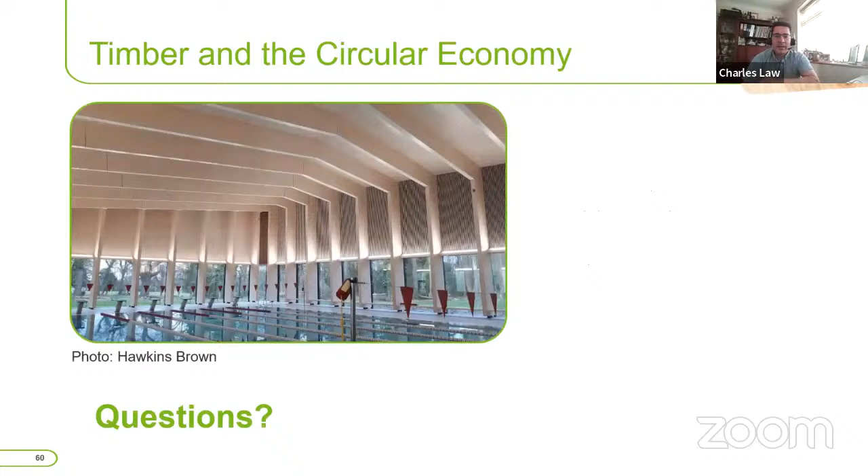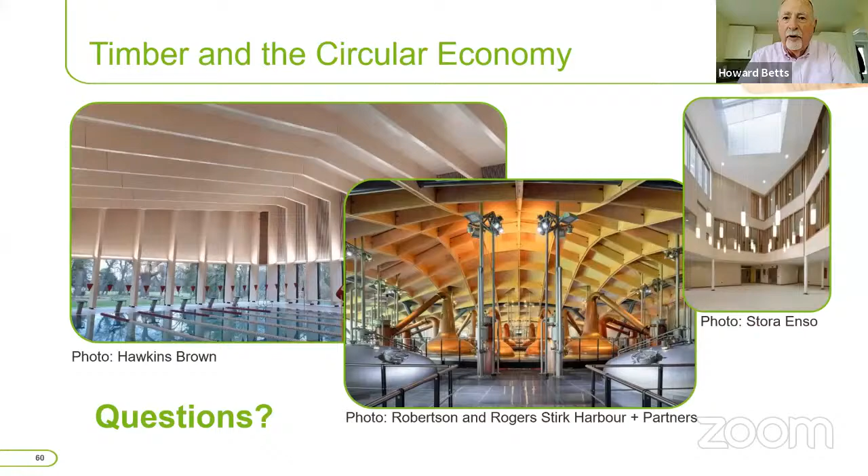Yeah, thanks very much, Charles. We have some questions. Abraham, could you please put those up on the screen, the first one. Just be patient while it comes up. So take the first one: with Russian and Belarusian timber now out of the market for many in the Western world, how will this loss of timber be made up as we move to using more timber? Yeah, good question, absolutely great question.

Right, so the key products that were coming out of Russia were very much birch plywood - the very high quality plywood we might use for things like furniture. They're actually used for Marshall speakers and things like that. So that source is now very much gone. There's very little birch plywood available at the moment.

So we need to think about other finished timbers that we might want to use in place of that. It's a difficult one, but where you're using it maybe on a wall, as long as it's fixed in place, could you use something that's got a bit more texture to it, like OSB? That might be something you want to think about if you want it as a decorative finish.

As far as plywood, if you do need to use it, there aren't many examples. I know the Timber Development UK, the timber trade body, is looking at whether there are alternatives out there. There are some good quality plies, but they might not have all the properties you need. For example, birch ply has very good acoustic properties, hence why it's used in Marshall speakers, and there's debate whether there's another plywood they could use for that. So you will need to discuss with your suppliers if there's any other source.